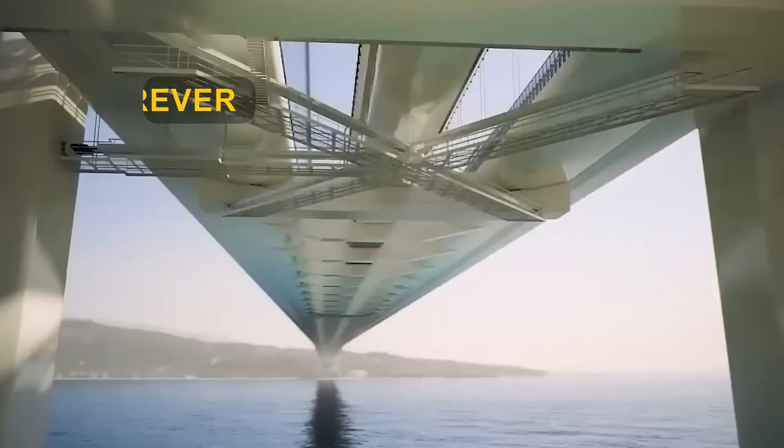Stretching across the stormy Strait of Messina, Italy plans a bridge so colossal it could replace ferries forever, but the challenges beneath the waves are more dangerous than anyone imagined.

The Strait of Messina, a narrow slice of turbulent water that separates Sicily from mainland Italy. For centuries, ferries have carried people, cars, and cargo back and forth, battling fierce currents and sudden storms. But Italy has a vision, a bridge unlike any other.

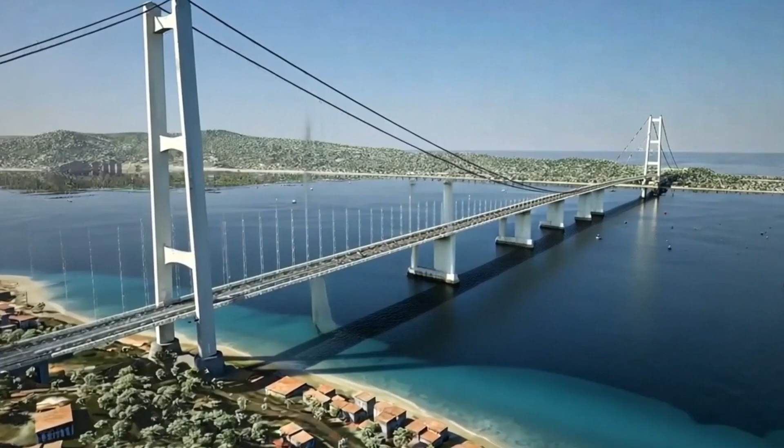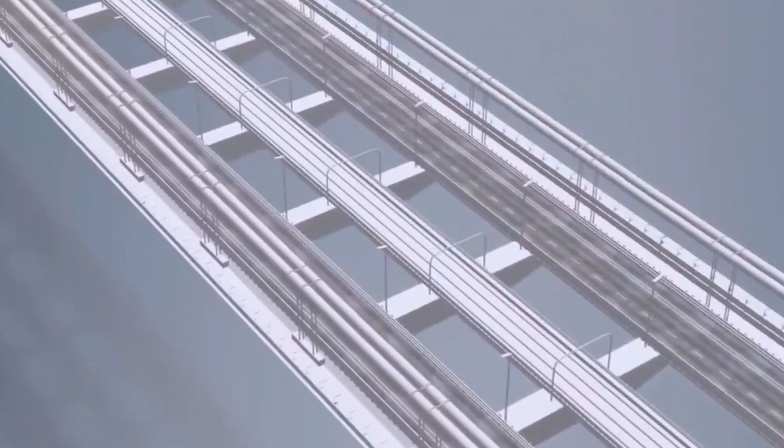Imagine a 3.7-kilometer span, soaring above the restless waves, connecting two lands that have long been divided. Not just a bridge, but a monument to ambition. Engineers dream of towers taller than cathedrals, cables stronger than steel, foundations anchored deep into the seafloor. Every detail, every calculation, every bolt carries the weight of history. This isn't just infrastructure, it's a statement.

A bridge that promises speed, safety, and a future where ferries may no longer be needed. But building a bridge here won't just be difficult, it could rewrite the limits of engineering itself.

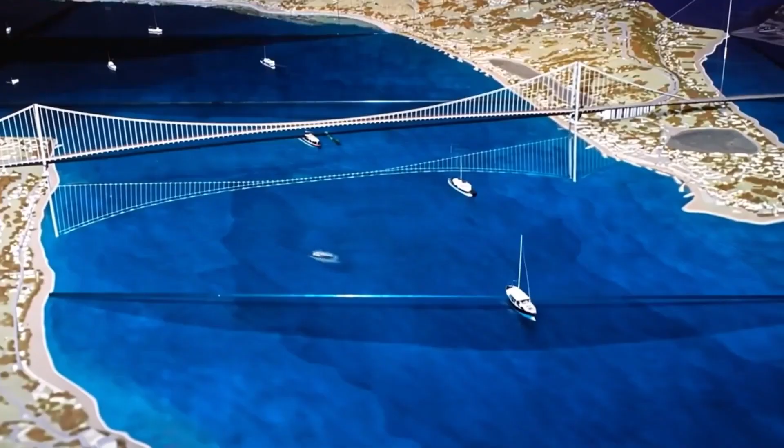Every day, thousands of vehicles and passengers rely on ferries to cross the Strait of Messina. But the journey is slow, sometimes hours lost to delays. Storms, rough seas, and mechanical failures disrupt schedules. Costs pile up, not just for travelers, but for businesses and trade that rely on this lifeline.

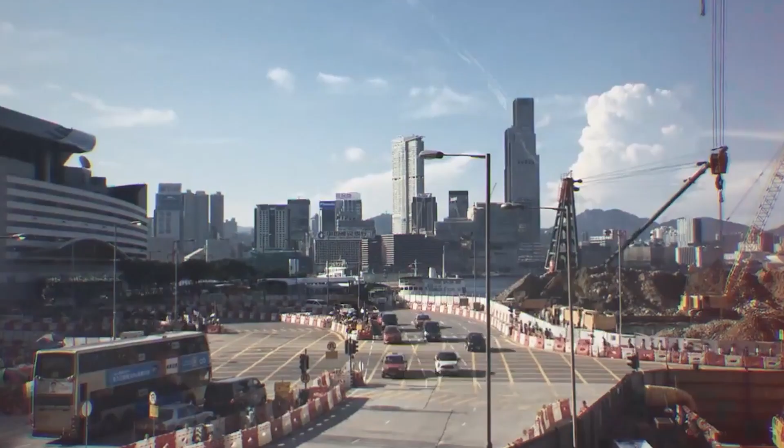For Sicily, the ferry is more than transportation, it's survival. The island's economy depends on it, communities depend on it. And for Italy, the bridge represents more than convenience. It's a chance to unify regions, stimulate commerce, and strengthen national infrastructure.

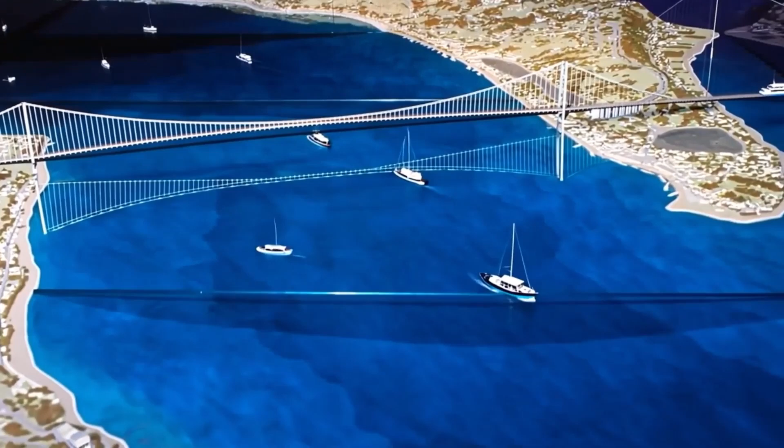Politicians hail it as a symbol of progress, engineers see it as a test of skill, and citizens dream of seamless travel. Yet, every promise comes with a shadow. Despite the promise, critics warn this bridge could become one of the riskiest projects in Europe.

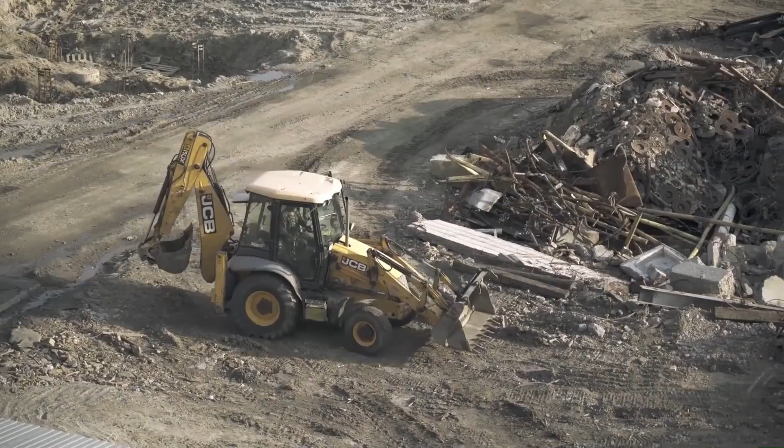Beneath the sparkling surface of the Strait of Messina lies a force of nature few fully understand. Powerful currents twist and turn, shifting unpredictably, challenging ferries and fishermen alike. The seabed plunges into deep, unstable trenches, while the region itself sits along one of Europe's most active seismic zones. Earthquakes have shaped this landscape for millennia, and they will not stop for a bridge.

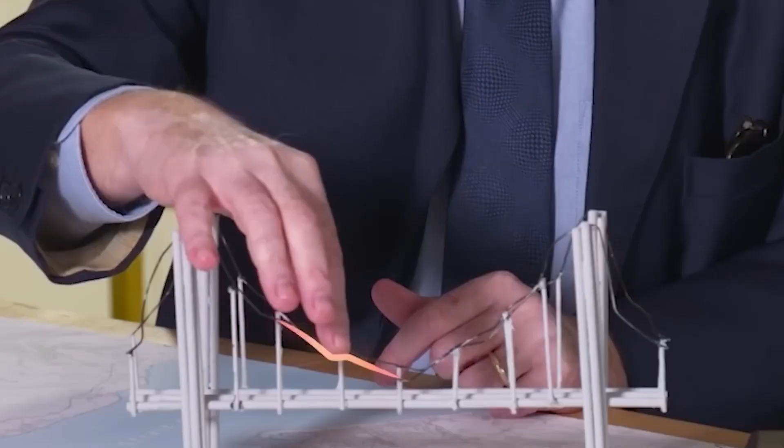Every engineering decision here carries a weight most bridges never face. Foundations must sink into shifting sands. Pylons must withstand winds and waves that could topple lesser structures. Even the water temperature and salinity can affect steel and concrete over decades.

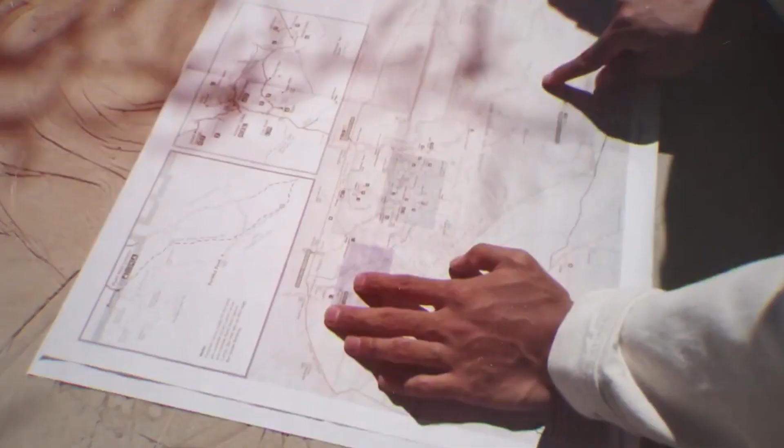What engineers discovered beneath the waves would shock the world. Designers are pushing technology to its limits, trying to tame this natural chaos. If the currents and earthquakes don't stop it, something even more unpredictable might.

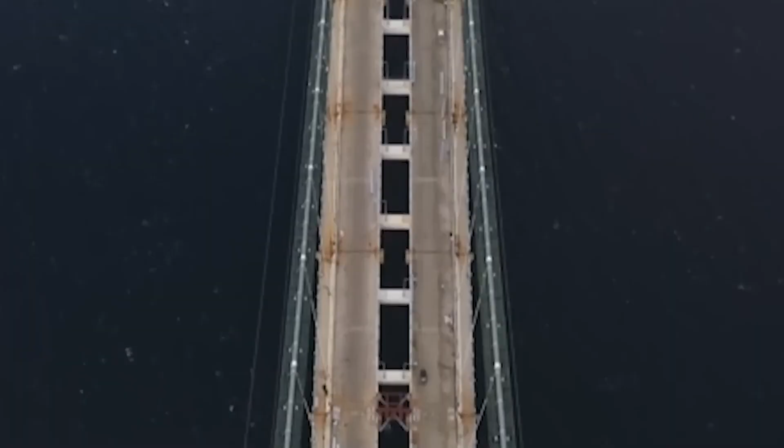At 3.7 kilometers, the Strait of Messina Bridge isn't just long, it's monumental. Its main span will stretch farther than most suspension bridges in Europe, a feat that tests both engineering and imagination. Towering pylons, taller than cathedrals, will rise from the seabed, piercing the sky. And the cable system, thousands of tons of steel woven together, will hold the entire structure in a delicate balance against wind, waves, and earthquakes.

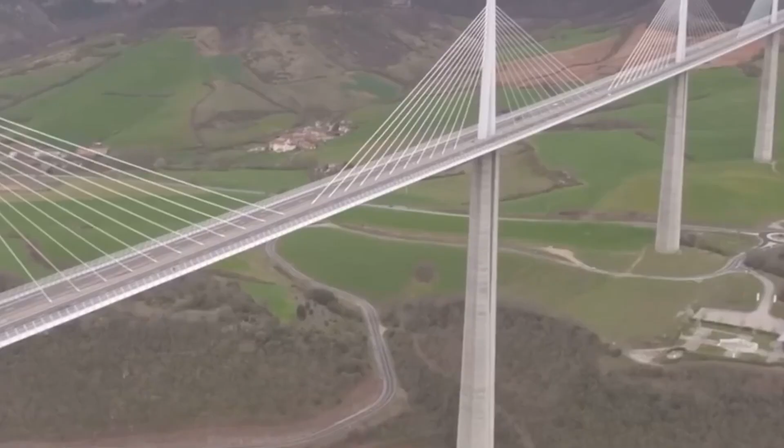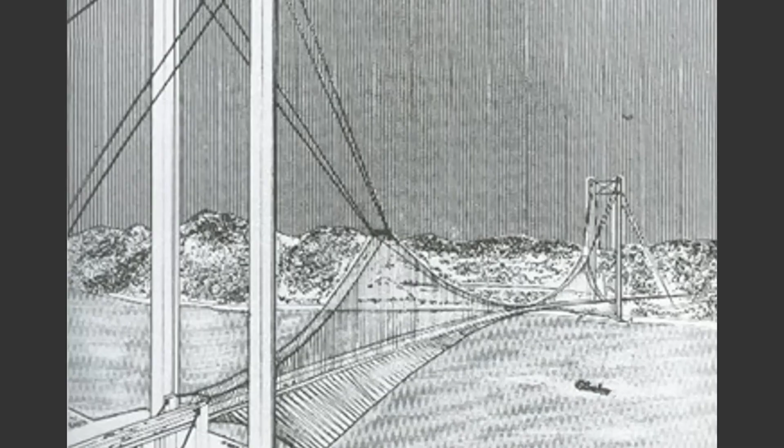To put it in perspective, the length alone could connect two major cities, the pylons could dwarf famous landmarks, and the steel used is enough to build small ships, dozens of them. Every meter of this bridge screams ambition, and the materials alone could sink a small island. This isn't just a bridge, it's a masterpiece of human ingenuity.

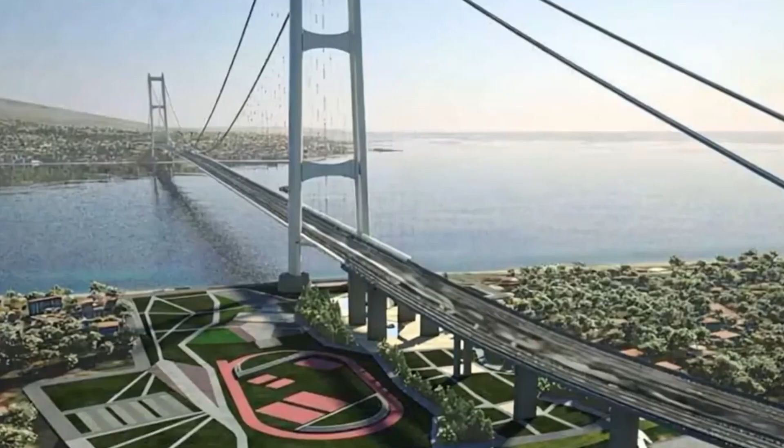The suspension design alone pushes physics to its limits, with cables stretching thousands of meters, engineered to flex, bend, and absorb the forces of wind and seismic shocks. Foundations must anchor into shifting, quake-prone seabeds, a task that has stumped engineers for centuries.

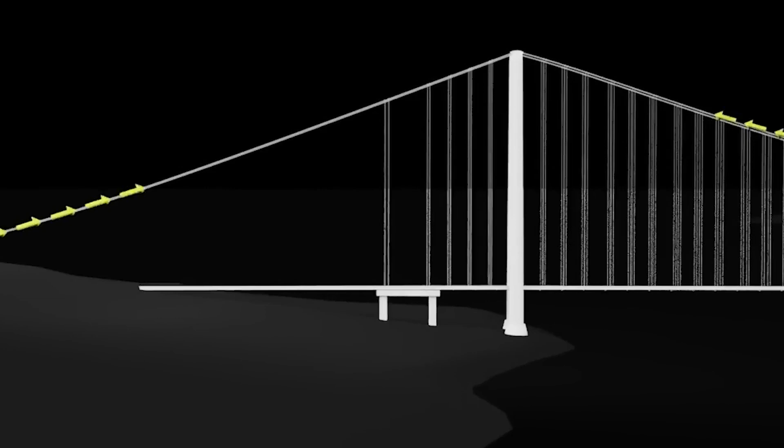Wind-resistant cables, shock-absorbing pylons, and smart monitoring systems will all work together to ensure the bridge stands tall, even when nature tries to tear it down. Every component is a marvel, a balance of strength and precision that leaves most experts in awe.

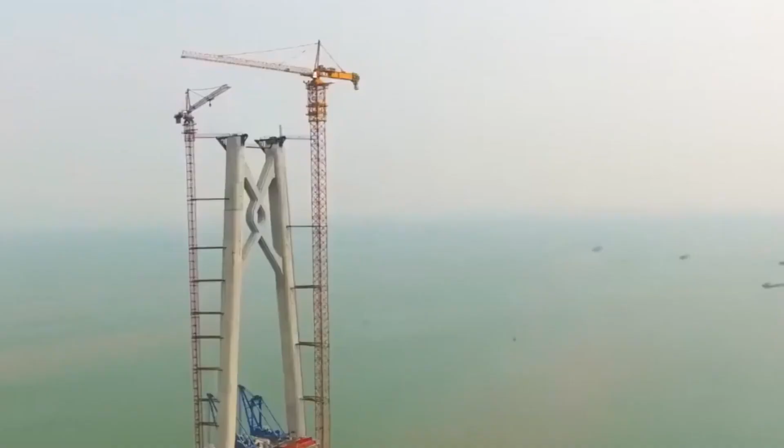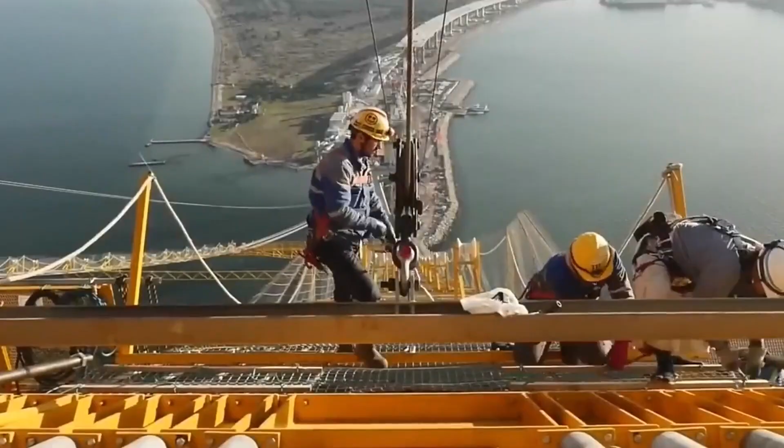Yet, genius alone may not be enough. The Strait of Messina throws curveballs that no textbook can fully prepare for, currents that twist unpredictably, winds that howl like storms from another world, and tremors that shake the earth beneath. But even the brightest minds face a problem that could ground the entire project. The Strait of Messina Bridge isn't just a feat of engineering, it's a battlefield of politics.

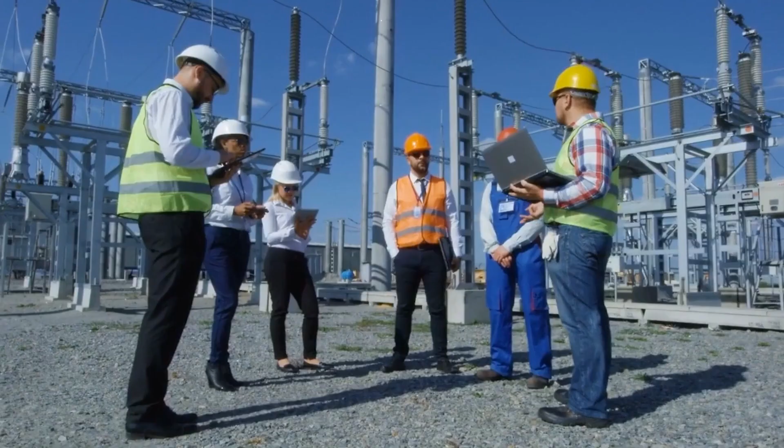Governments clash over budgets, delaying decisions for years. Environmentalists warn of irreversible damage to fragile marine ecosystems. Regional leaders debate priorities, each faction demanding control, each vote a potential roadblock. Every announcement ignites protests or celebrations.

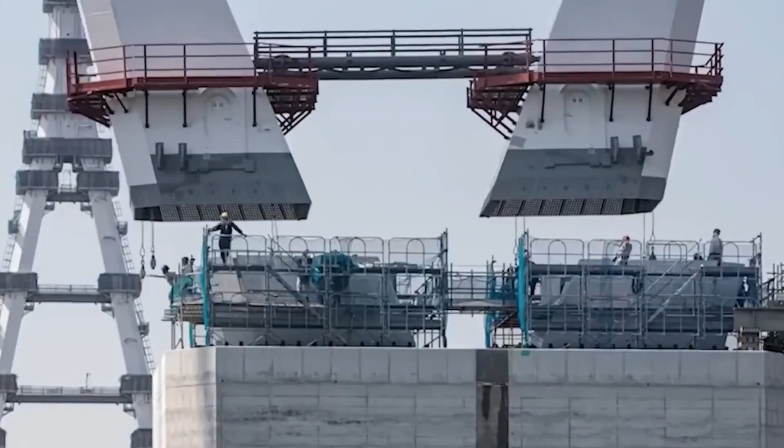The dream of a bridge uniting Sicily with the mainland is constantly weighed against political agendas and public opinion. Funding promises can vanish overnight, replaced by scrutiny and lawsuits. And just when it seemed unstoppable, a scandal erupted that could halt construction entirely. The fight isn't just over steel and concrete, it's over the future of Sicily itself.

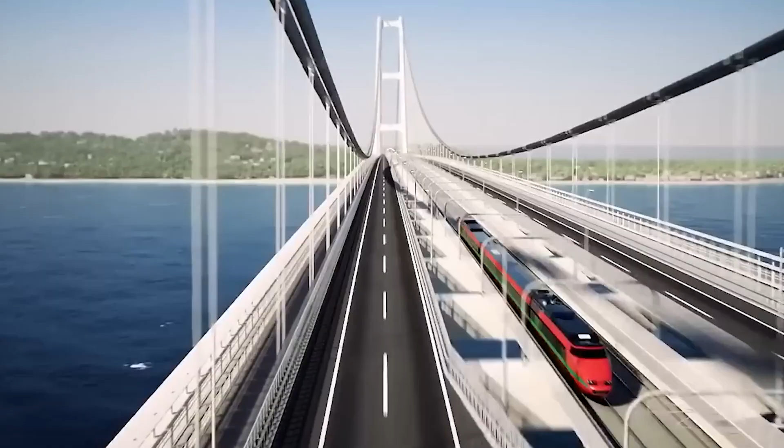The Strait of Messina bridge comes with a price tag that can make governments pause, an estimated 6 to 8 billion euros. Every euro carries weight. Funding must be split between public coffers, private investors, and international loans.

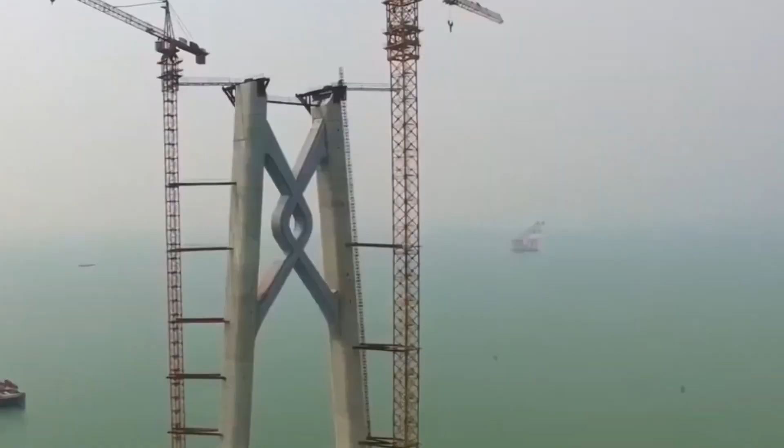The Strait of Messina bridge isn't just an Italian project, it's a statement to the world. Spanning 3.7 kilometers, it would rival the most iconic megabridges on the planet, standing shoulder to shoulder with feats like the Akashi Kaikyo in Japan or the Golden Gate in San Francisco.

Beyond engineering, its impact stretches to trade, tourism, and global reputation. Faster transport links could transform Sicily's economy, attracting businesses, travelers, and investment. Italy would showcase not just technical prowess, but ambition, vision, and innovation on a global stage.

But the world isn't just watching. It's betting on whether this dream can survive reality. Because one failed test could humiliate Italy on a global stage.

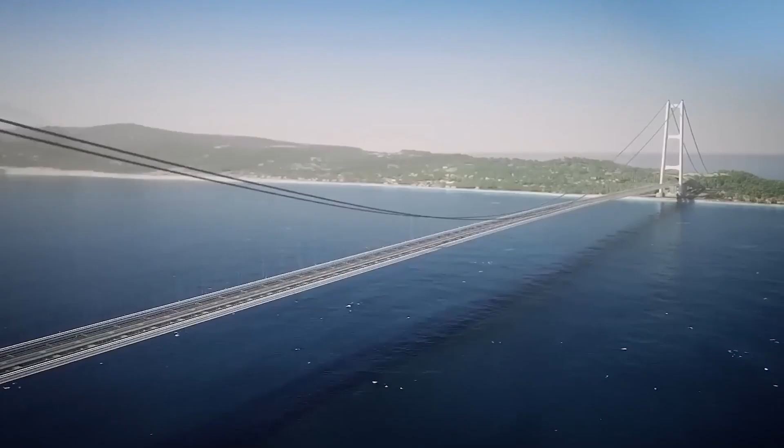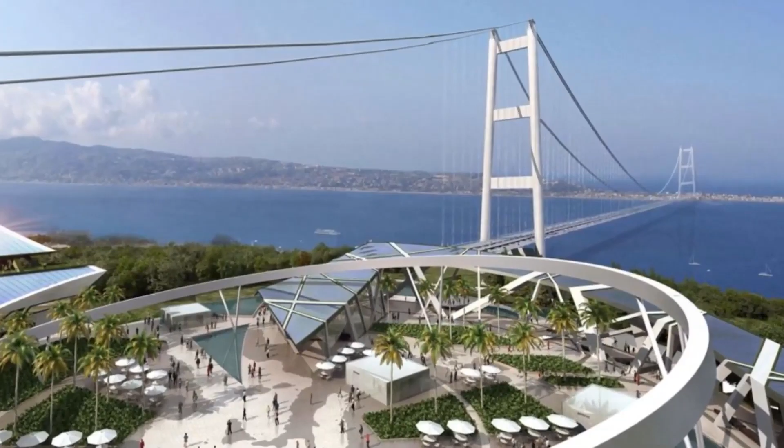The Strait of Messina bridge is more than steel and concrete. It is a vision of the future. Imagine high-speed trains racing across its span, cutting travel times from hours to minutes. Picture smart sensors and AI systems monitoring every cable, every pylon, adjusting in real time to weather and stress.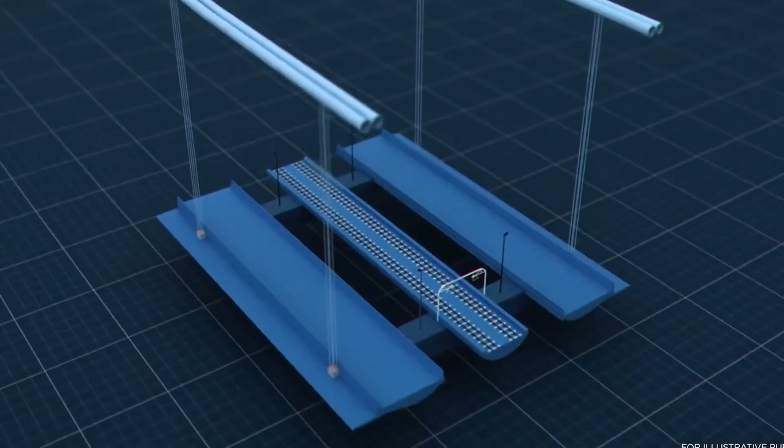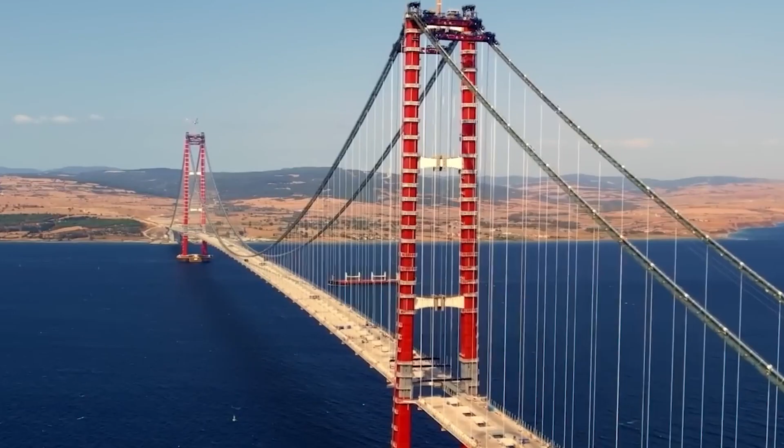Climate-resilient design could make it a blueprint for bridges worldwide, redefining what is possible in infrastructure. This bridge could become a symbol, a monument to human ingenuity and bold ambition. It isn't just about connecting lands, it's about connecting ideas, technology, and generations. But turning vision into reality is a gamble no one can predict.

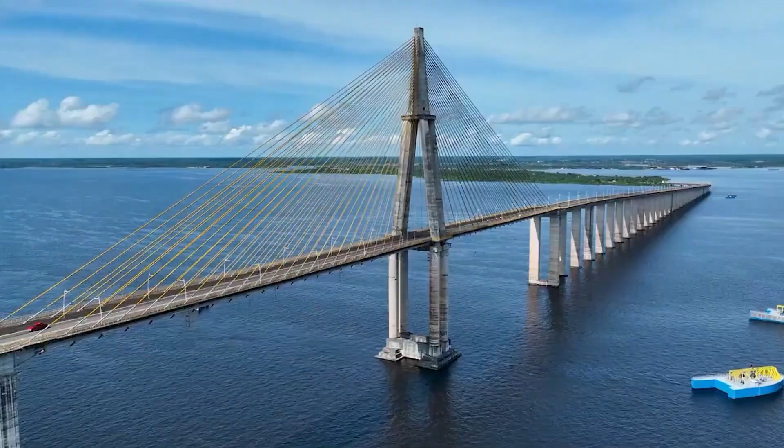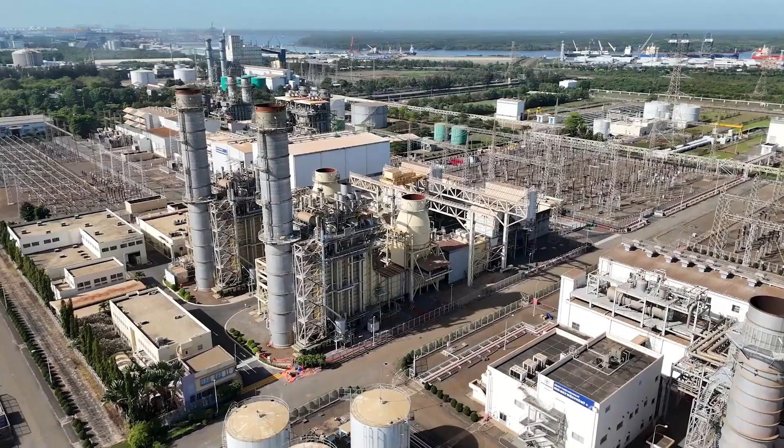Across the globe, engineers have faced challenges like these, and sometimes failed spectacularly. The Akashi Kaikyo Bridge in Japan, a record-breaking suspension span, overcame earthquakes and typhoons through meticulous planning. The Golden Gate in San Francisco defied wind and corrosion for decades, becoming a symbol of resilience and innovation.

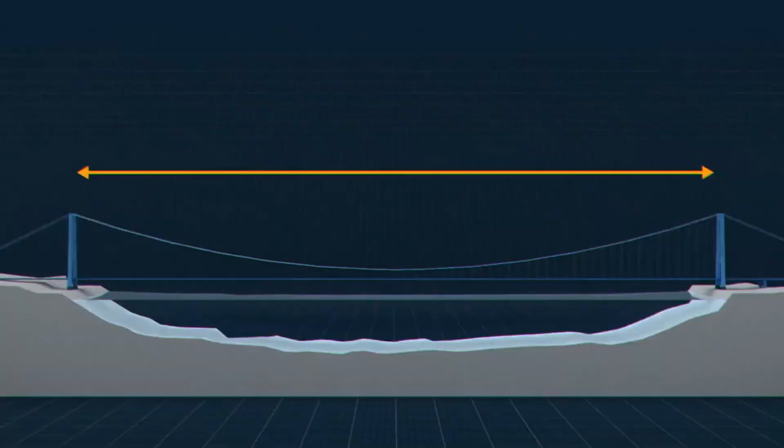Every megabridge tells a story of ambition, risk, and ingenuity. Some succeeded, some struggled, but all left lessons etched in steel and concrete. Italy's engineers study these feats closely, adapting techniques, avoiding mistakes, and pushing boundaries further.

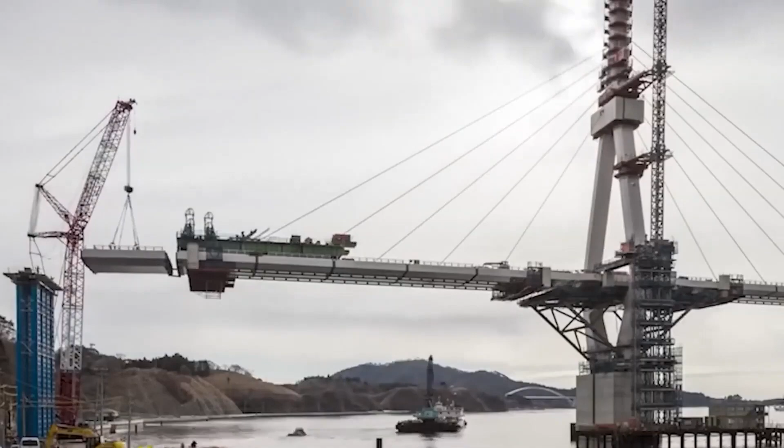Yet the Strait of Messina presents problems no bridge has ever faced: shifting currents, deep trenches, and a seismic history that could turn plans upside down overnight. Could Italy beat the odds, or will history repeat itself?

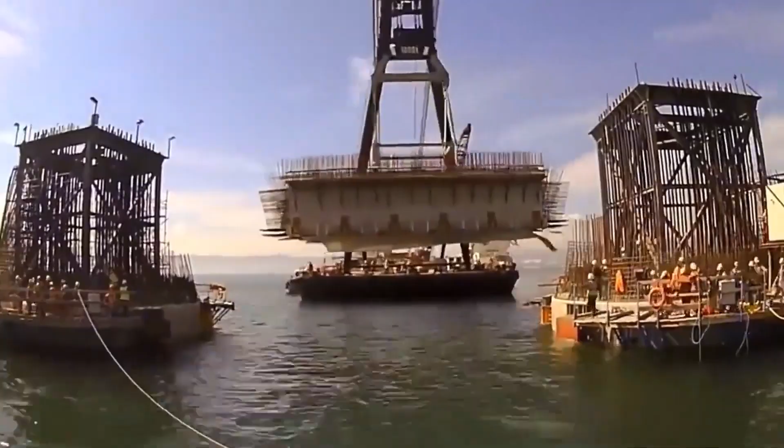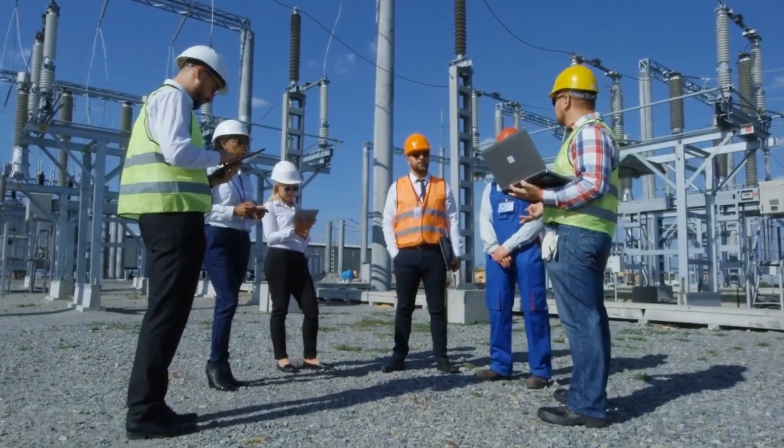The Strait of Messina bridge stands at the edge of possibility, a structure that could replace ferries, slash travel times, and unite regions long divided by water. It embodies ambition on a monumental scale: towers that pierce the sky, cables that stretch beyond imagination, and engineering solutions that defy conventional limits. Its story is more than steel and concrete.

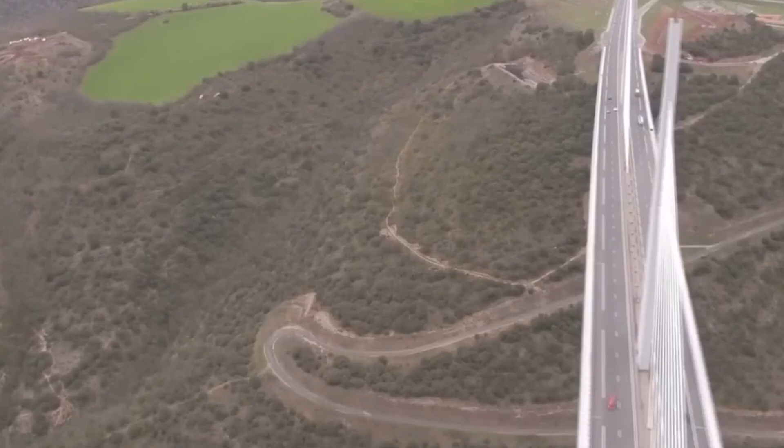It is politics and controversy, human courage and ingenuity, and the relentless pursuit of a dream that could redefine an entire nation. Economies could thrive, trade could flourish, and Sicily's connection to the mainland could finally be seamless. Yet the challenges remain immense.

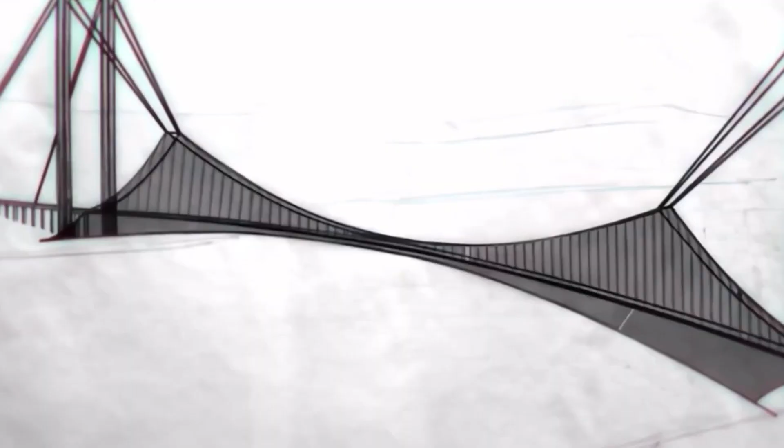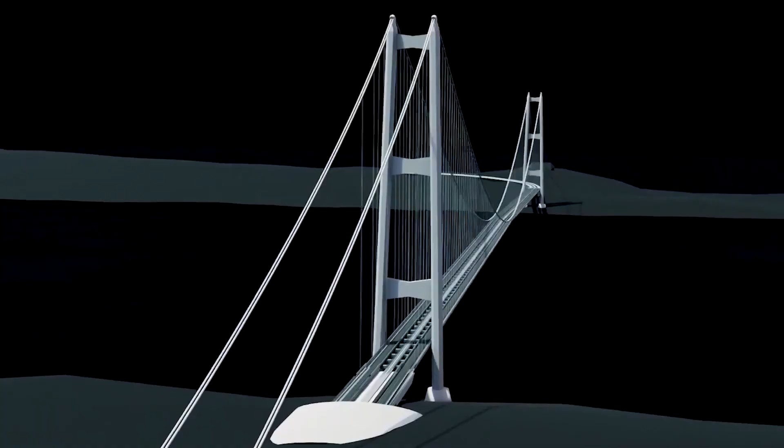Nature tests every calculation, budgets strain every decision, and the eyes of the world watch with equal parts hope and skepticism. The future of Sicily hangs in the balance, and every day brings a question that lingers over this ambitious project. The question remains: will this megaproject rise triumphantly, or sink into legend as a bridge that never was?